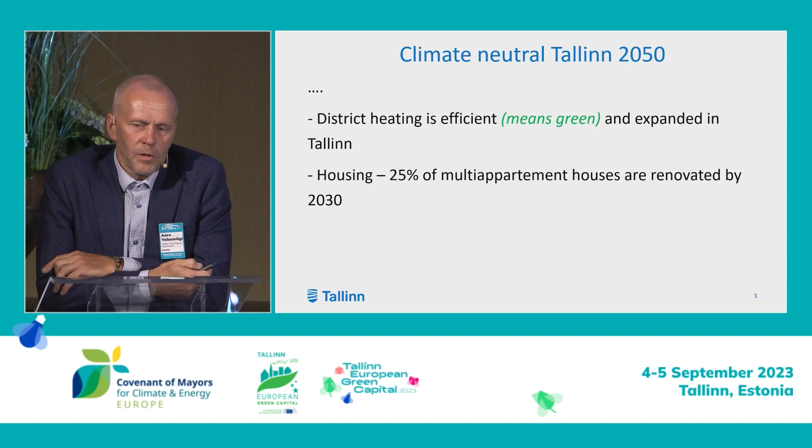But as the city of Tallinn, we will give very good examples so they understand that there is no risk to renovate the houses.

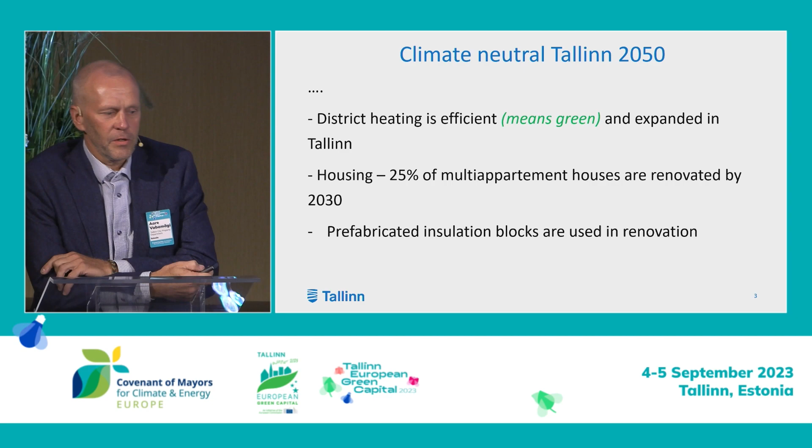One fast way to renovate is the prefabrication of insulation panels. I will go deep into the explanation of what this prefabrication means.

So this is our city, and the challenge is that 25% of this city should be renovated. This housing should be renovated by 2030 - a very high target.

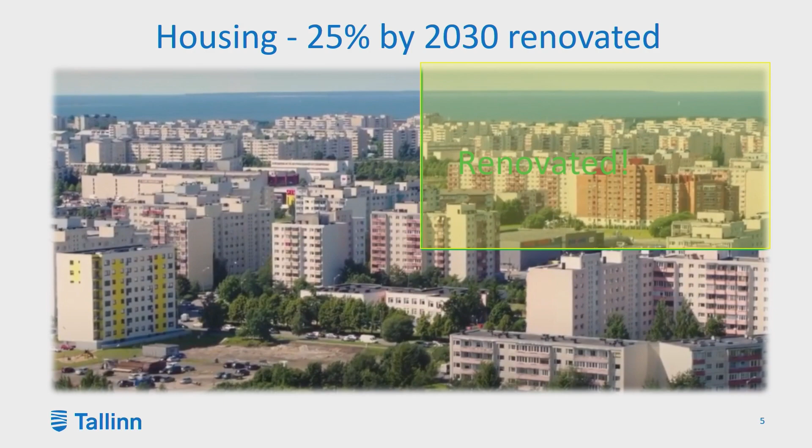About prefabrication of this insulation block, which is one very serious possibility to reach this target - the process of designing this, I will show in the video now.

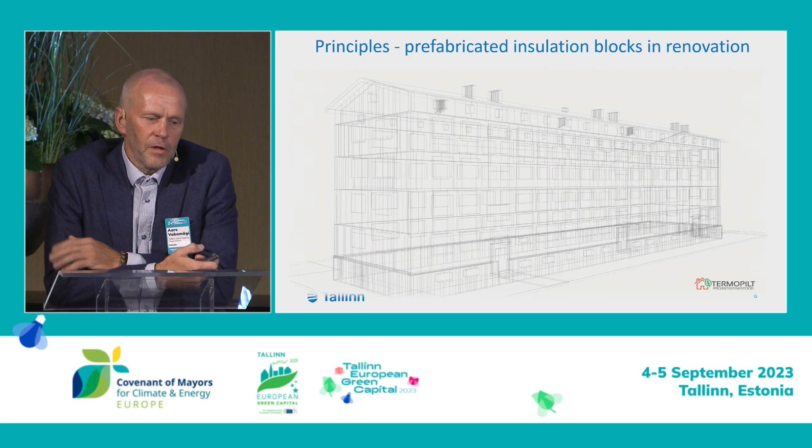First of all, we will laser scan this building, making it in the paper like in pieces, making very nice drawings, thinking it very deeply in the engineering bureaus, making all the pieces ready in the drawings, and then after we finalize this process, the drawings will be sent to the factory.

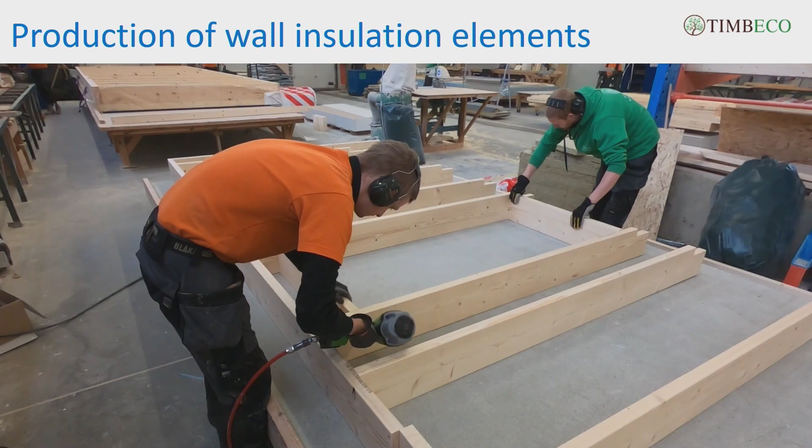This is old-fashioned, that we will do something in the building for 6 months. The building is covered with plastic, and then people are doing something there. In the new ways, all the designed elements of prefabricated insulation blocks will be produced in the factory.

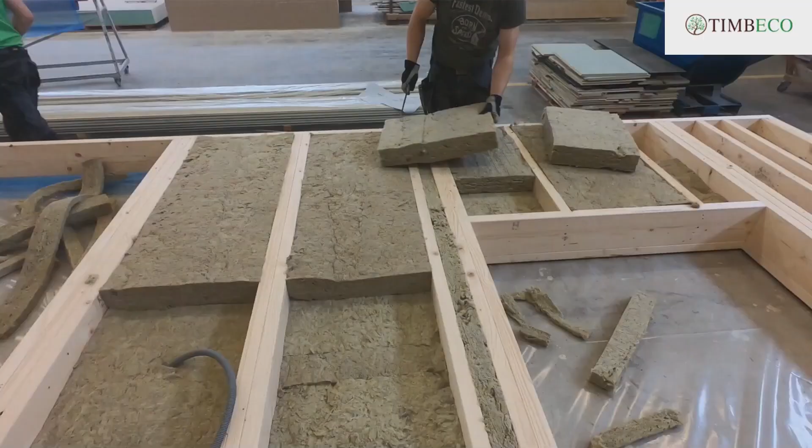The condition of the materials is high quality - there is no rain in some weeks, no temperature changes in the working field. The panels will be high quality and high quality insulated, and the panels which go out from the factory are ready to install in the building.

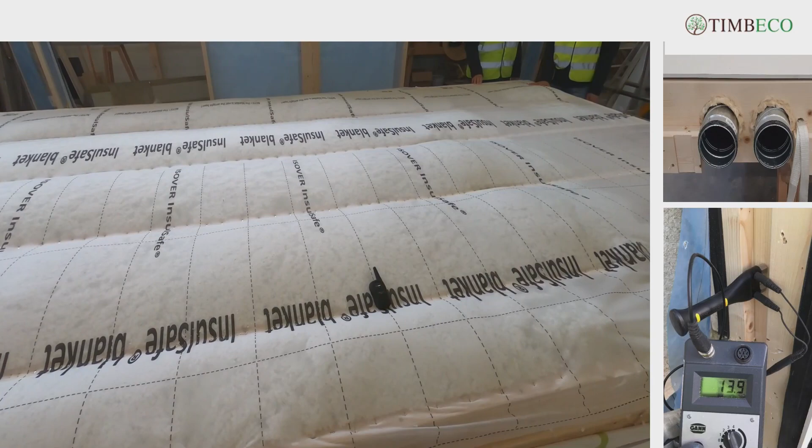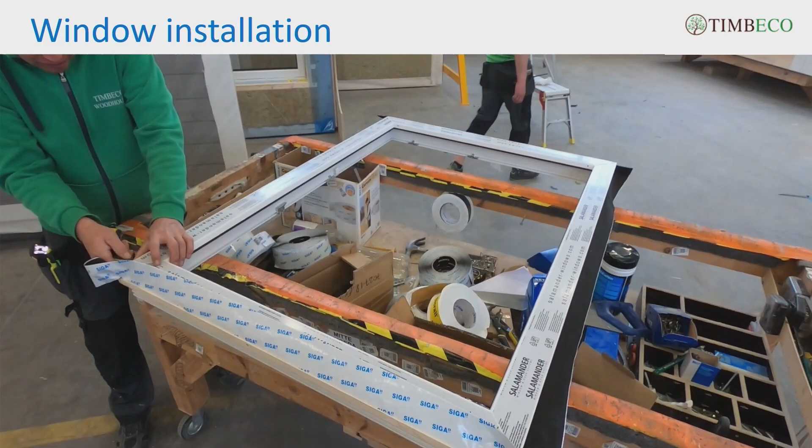Also, the insulation is good, tight, and the ventilation system is already in the panels, so you don't need to start piping in the house. Windows are well done, tightly installed.

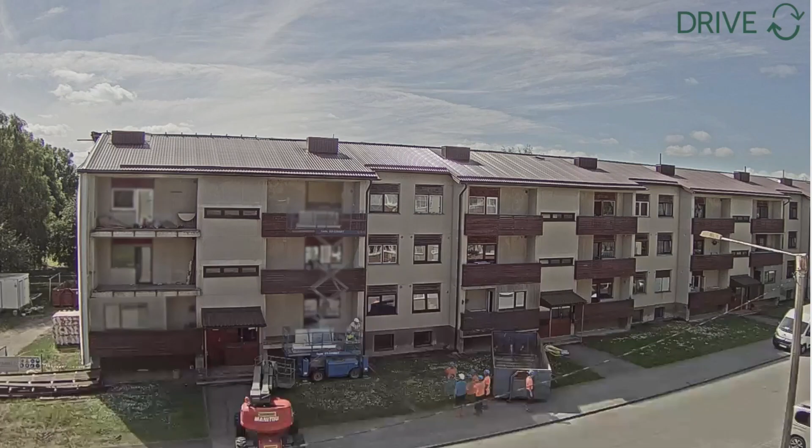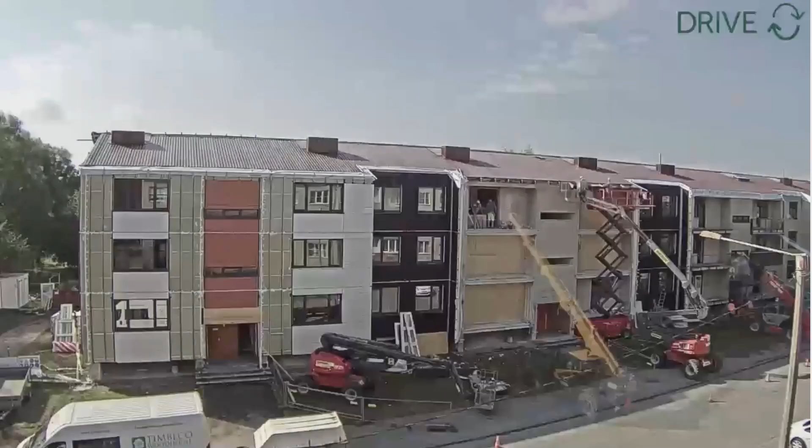Now we see that there is a house waiting for the panels. Now the panels are coming, and they will be installed during, I think, 2 weeks until 1 month. And the house looks after that like a new one.

Also with a solar power plant on the roof, giving the electricity needed for the newly installed ventilation system. And it gives the possibility to go down with power consumption.

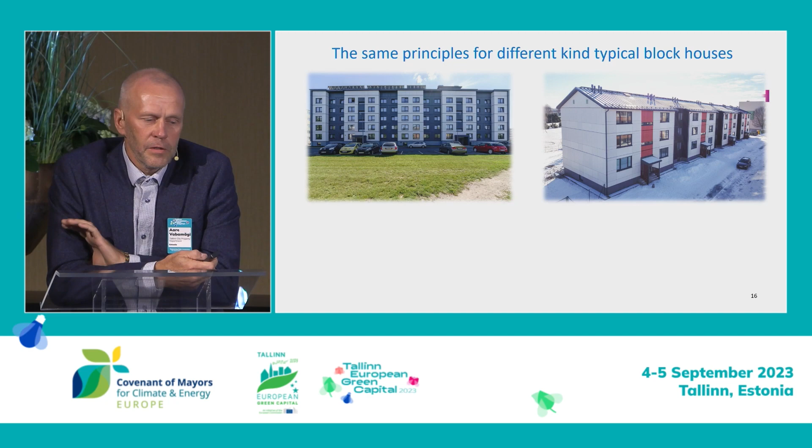The principles of different kinds of typical block houses are the same. We have many pilot cases already, and at least 2 of them have been studied with Tallinn Technical University scientists, so the solution is ready and working well. But the principle is there should be before renovation, after renovation - if there is a typical house, then the solution is also typical.

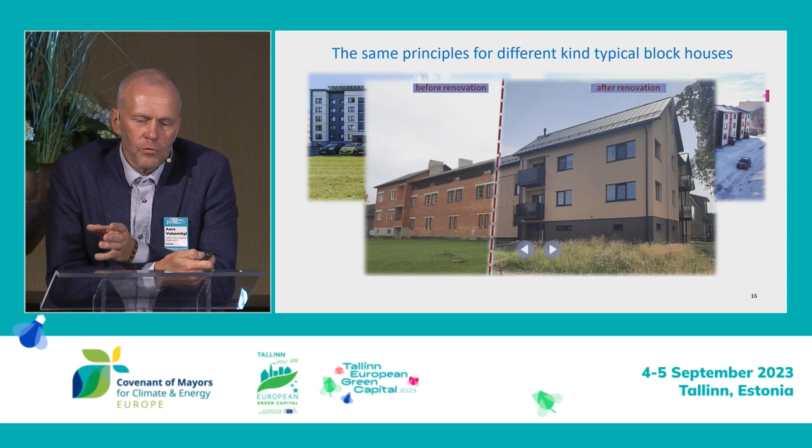Now about Tallinn and Tallinn-owned buildings. The reduction of emissions in buildings means that compared with 2022, where the cake looks like this - there is a huge part of district heating, which you will see is not as green as we would like.

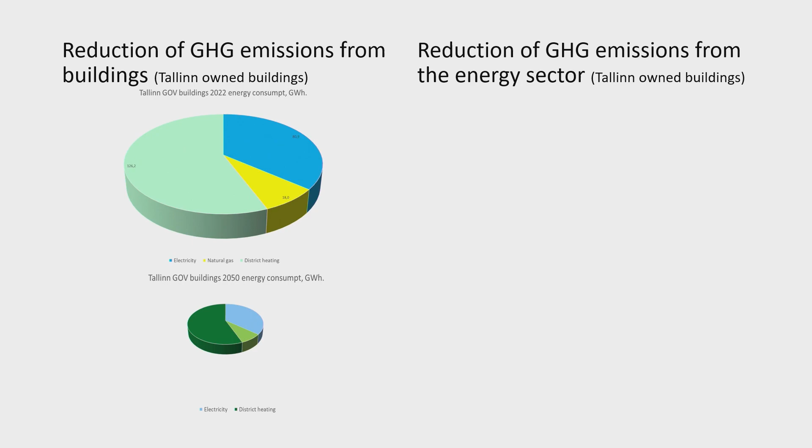It still consists of some gas, as Robert told. We have about 18 gigawatt hours of gas still in use, and this blue part is electricity. What we should do means we should shrink the cake - the specific consumption of energy should go smaller. And as you see, the district heating should be very green, meaning zero emission district heating. We will replace as much of the gas as possible. Where district heating is available, we will move away from gas.

But sometimes I'm thinking maybe the gas should go green. Then the pipes are still available and we'll change the natural gas to biogas, but it takes time, and a lot of resources are needed. I know the Tallinn buses still don't have enough green gas. And if you put it in the pipes and burn it in the houses, it's not used so efficiently.

But it can be a replacement for natural gas. So specific energy use per heated square meter should go down, and that means renovation, and also green and clean energy. Now about emissions in the energy sector.

Tallinn started, as our mayor also told, a project with solar power plants. We will install them, and in the middle of next year there will already be 30 solar power plants installed on roofs. We'll also connect gas-heated buildings to the district heating network.

Now about examples. I was explaining the designing process of prefabricated panels. We are already doing the design of one real building in Tallinn. This is a social house, and after one year it will look like the picture, with panels used so the house is renovated in an innovative way. The aim is energy class B. By the legislation it could be C, but we take one step further and design it as energy performance class B.

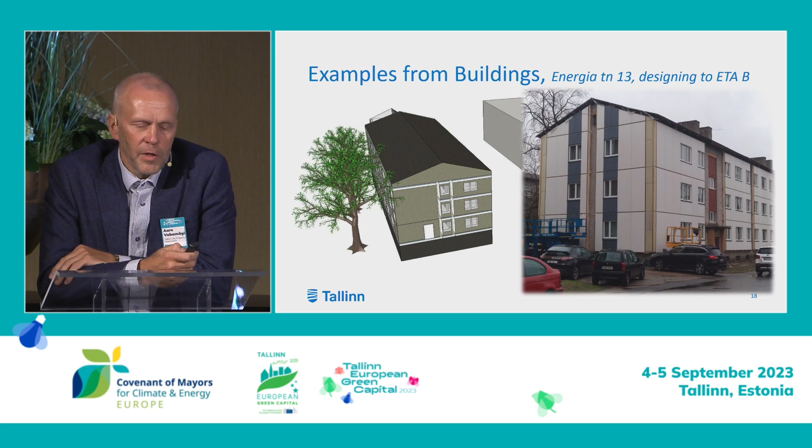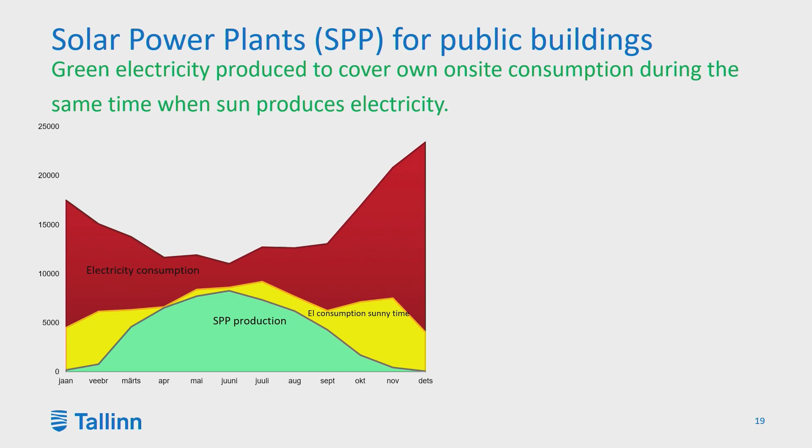Now about solar plants. Our principle is that we know exactly - this is the red part of the graph - how much our building uses electricity every hour of the year. And we can predict quite exactly what the building consumes at the time the sun is shining - this is the yellow part of the graph. Against that, we design the solar power plant, which is the green part of this graph.

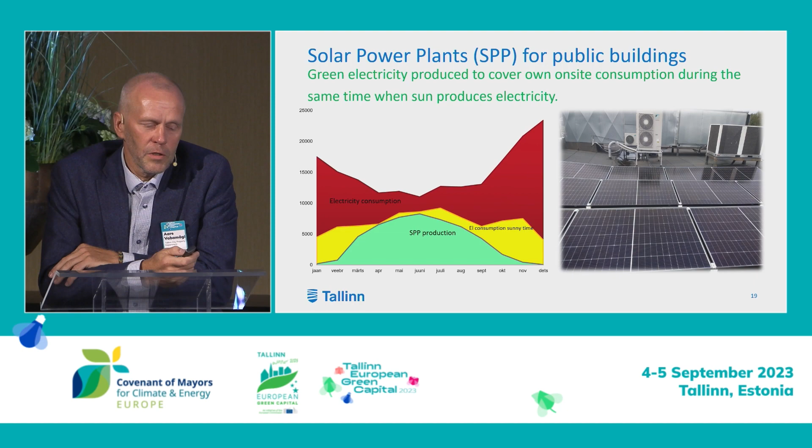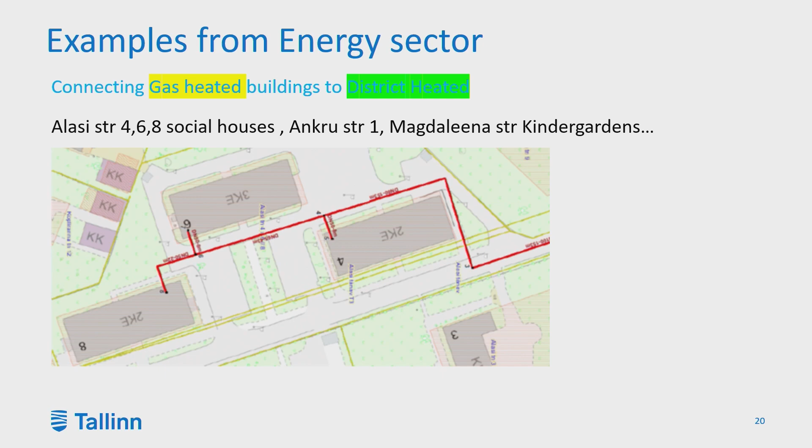Now we are going to the district heating. I'll give examples because we've already done very good cooperation with utilities. We have designed new pipes, and these are just examples. There will be 3 social houses connected to the district heating network already this year. The houses look like that, and there will be no gas boilers after that.

Then our city residence - Poska, in Kadrioru Stadium, quite a big consumer - will go to the district heating network. Sometimes the first step from the city side gives the possibility to develop the whole area, like in Kadrioru. There is only gas now, but we are putting the first pipe there. Our new building, Orangeri, will use district heating.

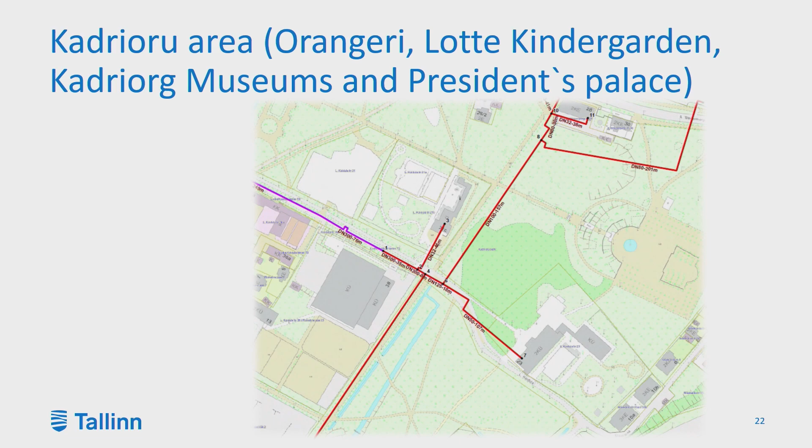During the same process, we will also run a pipe to the Lotte Kindergarten and Miia-Milla-Manda Children's Museum. The next step will be the Mikkeli and Kadriorg museums. And because the President's Palace is close by, the president will also get district heating instead of Russian gas. I'm proud that the government and our president will be heated with district heating.

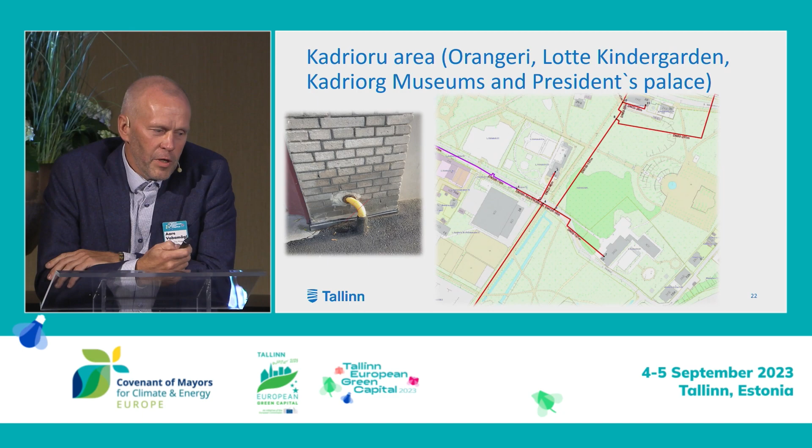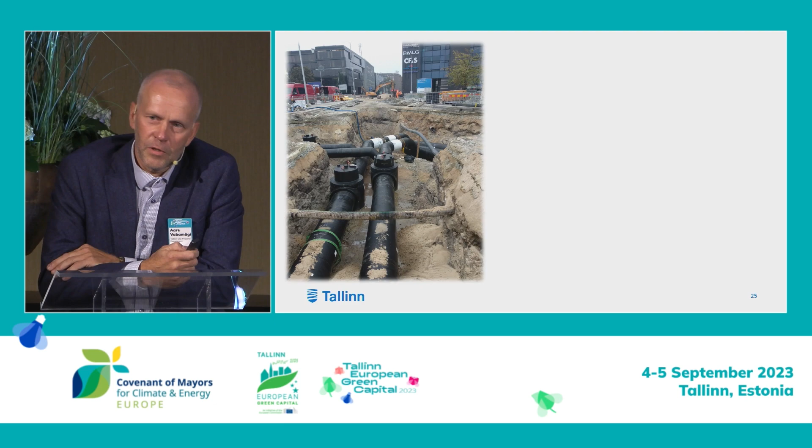So the main problem is that gas is already everywhere, and getting rid of these pipes is a problem. The next slide explains how we are reaching Kalamaja. Ristiku school is already in the pipeline. Kalamaja school and Salme cultural house will both be connected to district heating next year. And because the pipe is going to Kalamaja, there will be the possibility to connect to the same district heating pipes and get rid of gas.

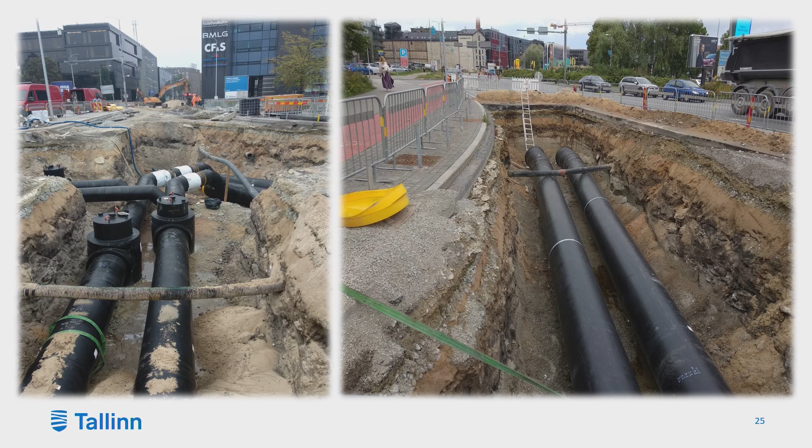But it seems very easy that the pipe is just coming. In reality, there is a lot of existing technical piping and cables already in the ground, and the district heating pipe has to go through all of this, and it costs a lot. So investment costs are really high at the beginning - about 1,000 euros per meter. But after that, it stays there forever and gives the opportunity to go green.

And my conclusions are that we are developing district heating to use green energy. The first steps are expensive, but we are doing it, and after that private citizens can follow the same way.

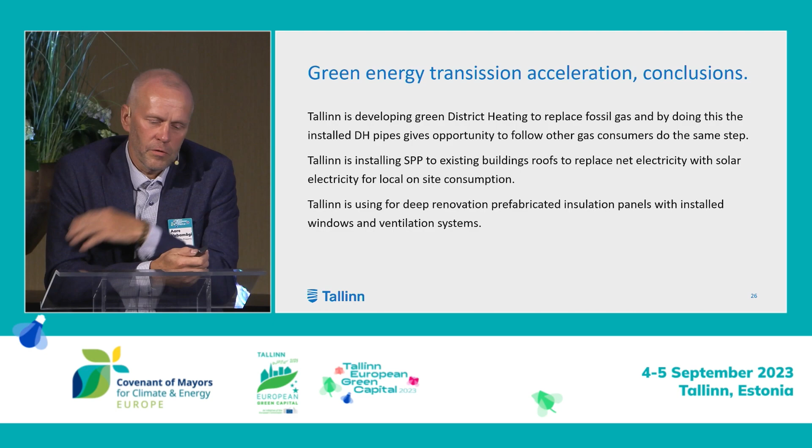We are installing solar power plants on the roofs of existing buildings, and also new buildings will already have them. Existing kindergartens, schools, and social houses will get solar power plants. We are doing deep renovation with prefabricated panels, which we think is innovation that gives speed to the renovation. As we heard, we need to speed up 3 times, 5 times, but without doing anything, it will not happen.

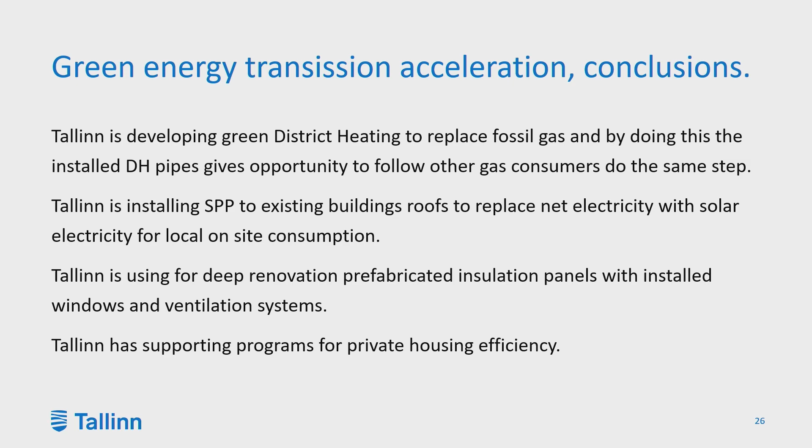Tallinn also has specific supporting programs for private flat owners' associations to renovate houses, to put in solar power plants, and to connect to district heating. So that was my part. Thank you.

Thank you very much. And of course, I'm super glad that Tallinn is planning district heating developments, taking into account the position of the moderator. Where does the moderator live?